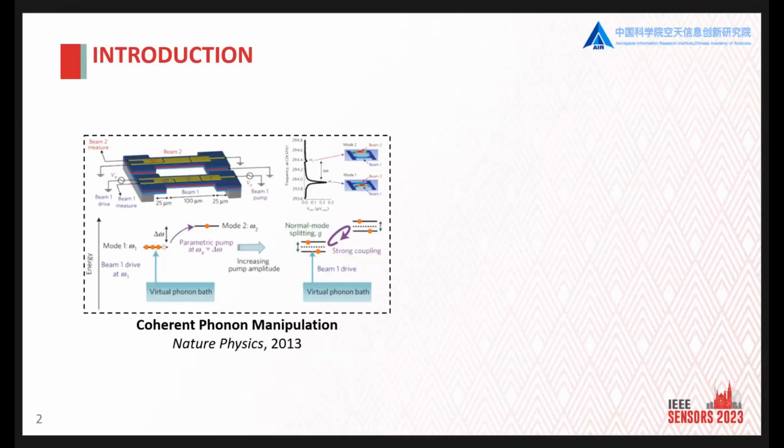In 2013, a paper published in Nature Physics demonstrated strong dynamic coupling between two mechanical resonators by periodically modulating or pumping the stress of the resonators. That is parametric pump. This strong coupling caused by parametric pump enables coherent transfer of phonon populations between the resonators, thus revealing the possibility of achieving high-speed operation of high-quality factor mechanical resonators. This is one of the earliest studies of parametric pump applied to mechanical resonators.

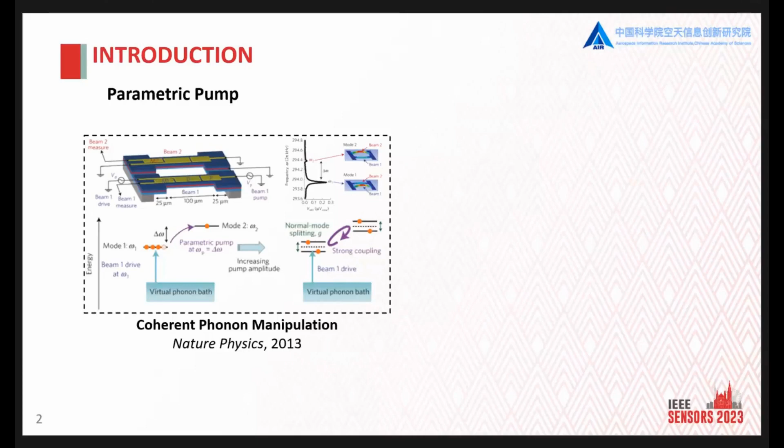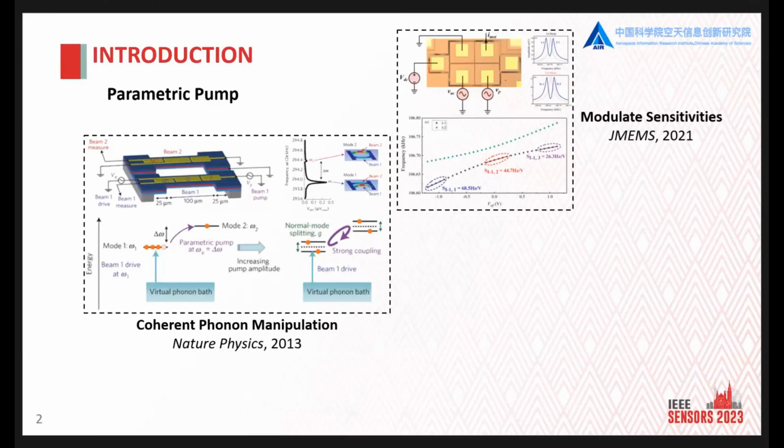Recently, parametric pump attracted great interest. In 2021, researchers proposed a new approach for enhancing the sensitivity of a resonant MEMS sensor based on parametric pump. The parametric pump periodically modulates the stiffness of the beam, thus creating a virtual energy coupling between two fundamental modes of the beam. And the operation region can be found like this. It can be found that the sensitivity of the resonant sensor can get over 100% enhancement.

In 2022, Miao and Zhou published an article in Nature Communications. They demonstrated nonlinear operation of electromechanical phonon cavity systems. By controlling the parametric pump, nonlinearity-mediated digitization and amplification in the frequency domain can be achieved, which can be exploited to build high-performance MEMS sensing devices based on phonon cavity systems.

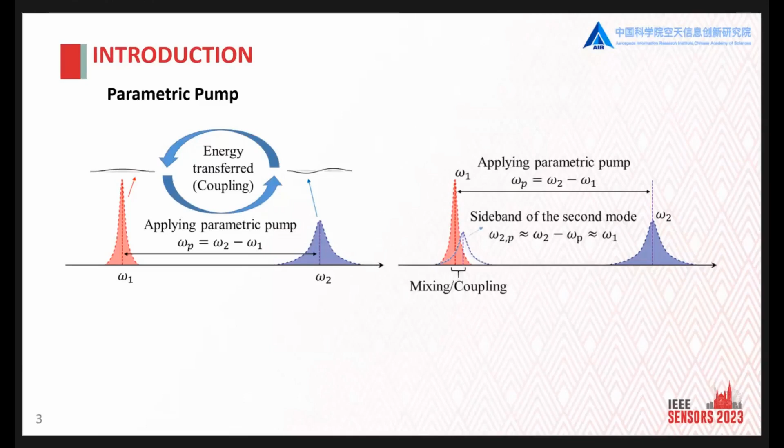Generally speaking, the parametric pump is applied to compensate the frequency difference between the first and the second mode of the resonant beam. Thus, the two modes can be coupled, and energy can be transferred between them, as shown in the left figure. Another explanation for this coupling is that with the parametric pump, there is a sideband of the second mode near the frequency of the first mode, resulting in mixing of the first mode and sideband, as shown in the right figure. Through this coupling, characteristics can be transferred between the two modes so that the characteristics of the sensor can be modulated. Equations of the coupling vibration can be obtained as follows.

In order to study the sensing application of parametric pump, simulation and experiments were carried out based on the resonant pressure microsensor as above. The pressure sensor is comprised of a glass cap for vacuum packaging and a silicon-on-insulator wafer for pressure sensing. Double-clamped beams are fixed on a pressure-sensitive diaphragm through anchors. The diaphragm is deformed by pressure, thus changing the stresses and frequencies of the beam.

We can see the electrode configuration of the beam in the center like this. It is electrostatically actuated by an AC voltage V_AC, and with another AC voltage V_P, parametric pump is introduced.

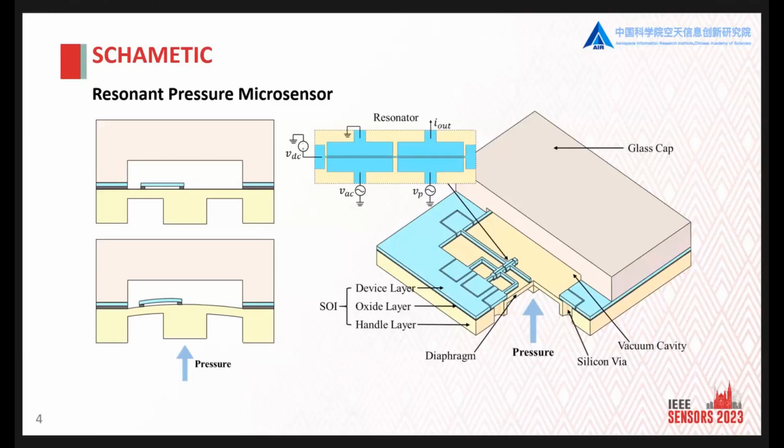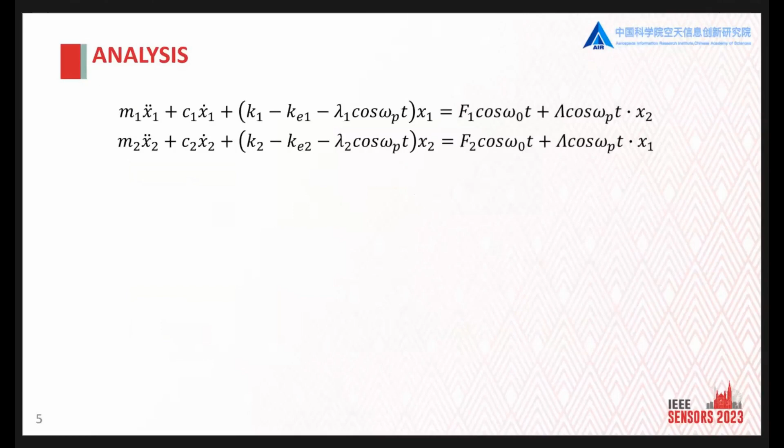First, to analyze the theoretical model of the system, the harmonic balance method is employed to develop the numerical solutions to the equations, which are the combination of harmonic terms like this. We mainly consider terms related to the first and second modes, that is to say, S takes 0 and 1. Other harmonic terms are neglected due to small responses.

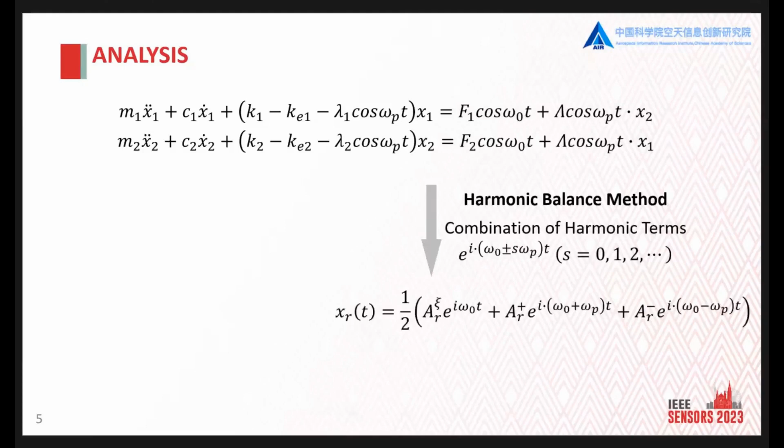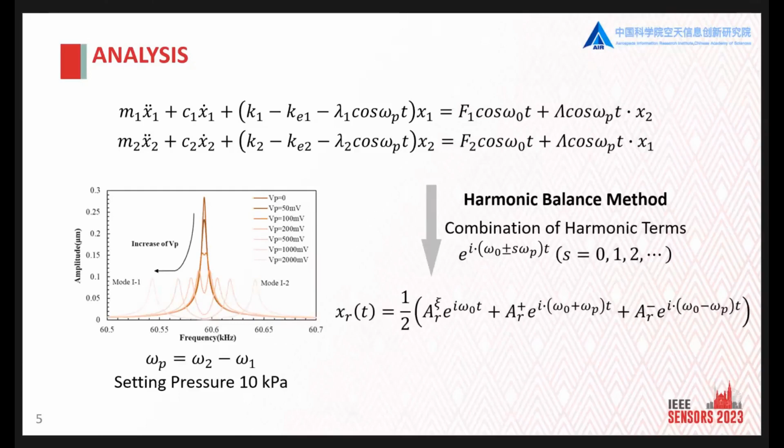With extra pressure disturbance, omega 1 and omega 2 are changed, and there is a mismatch between omega p and the actual frequency difference between the two modes, so that the distribution of energy between coupled modes is out of balance and mode localization occurs.

On the one hand, for frequency shifts, frequencies of the two new modes are separated from each other with pressure disturbance, which is called the veering phenomenon. As we can see, the sensitivity of mode I2 is transferred from about 164 Hz per kilopascal, approximately the sensitivity of the first mode, to 210 Hz per kilopascal, approximately the sensitivity of the second mode.

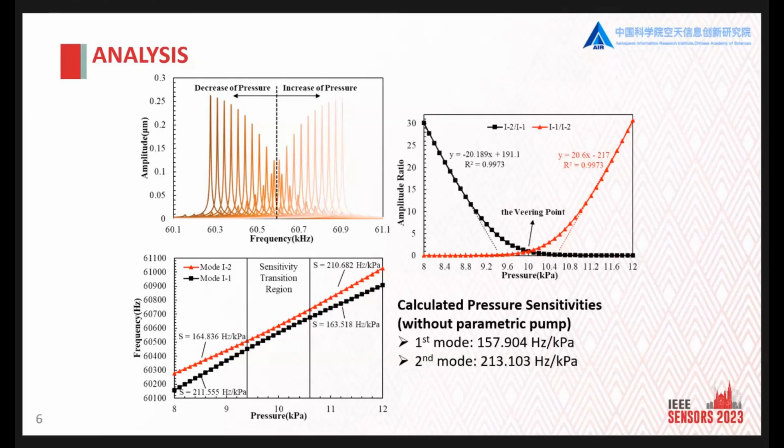In other words, modes I1 and I2 inherit characteristics of different fundamental modes outside the transition region. In the sensitivity transition region, the two modes are influenced by each other, and sensitivities are changing. On the other hand, as a function of pressure, the sensitivity of amplitude ratio is quantified as about 20 per kilopascal within the linear range, which is relatively over 1,000 times higher than that of frequency shifts.

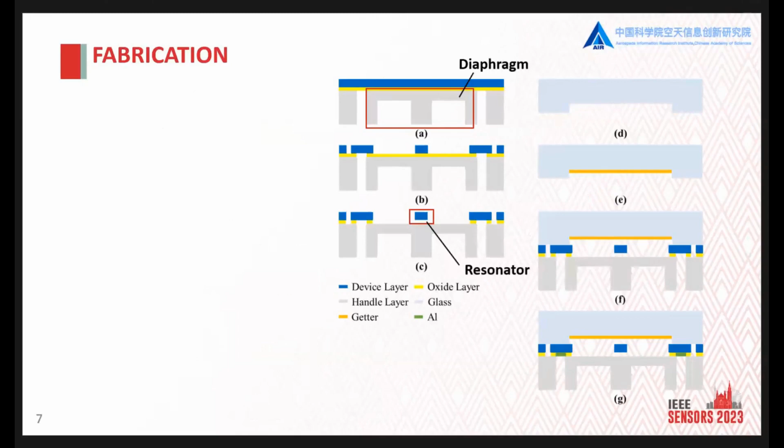In order to verify the theory of parametric pumps, the designed microsensors have been fabricated as shown in the figure above. The SOI wafer undergoes a series of lithography and etching to form the diaphragm and the resonant beams. Glass caps are etched and then bonded with the SOI, thus achieving vacuum package of the sensor. The finished sensor chip is 9.9 millimeter wide and 822 micrometer thick, as shown in the left figure.

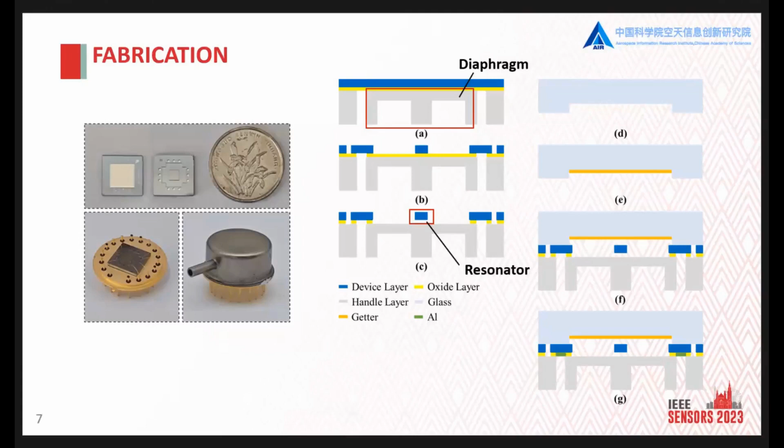Before the experiment, the chip was assembled on a Kovar base. Then, wire bonding was conducted between wires of the chip and pins of the Kovar base to realize electrical connections. Finally, a Kovar lid was soldered to the base to complete the package. The experiment platform is shown above, which mainly includes a circuit and a vector network analyzer for detecting the signals, a pressure controller for applying pressures, a temperature chamber for temperature control, and a signal generator providing the parametric pump.

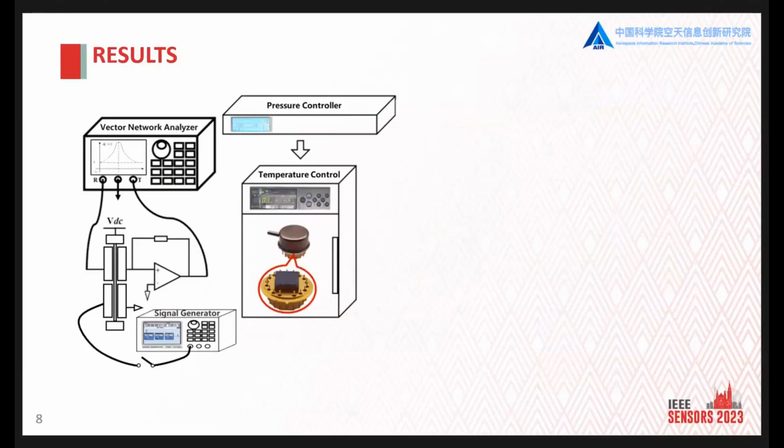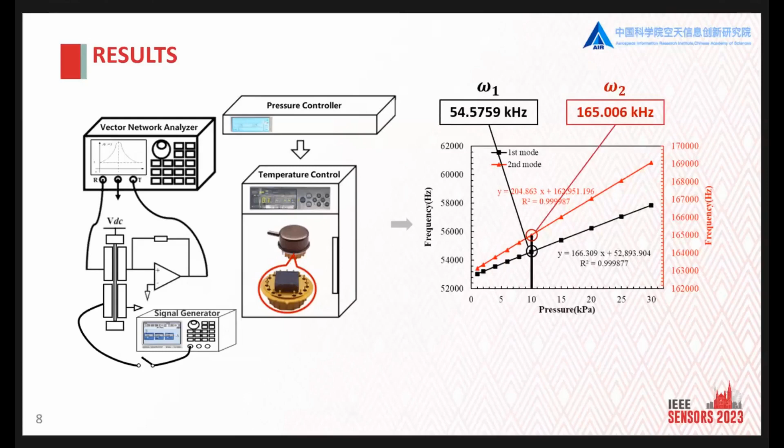The figure on the right shows the characterization result of the pressure microsensor without parametric pump. The pressure sensitivities of the frequency shifts of the resonant beam are about 166 and 204 Hz per kilopascal. Under the pressure of 10 kilopascal, the frequencies of the first and second mode are about 54 and 165 kilohertz.

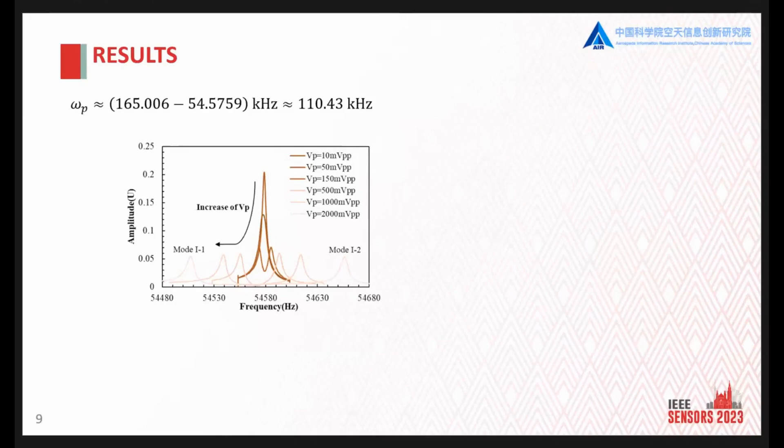With the increase of pressure, the pressure sensitivity of mode I2 increases from about 173 to 202 Hz per kilopascal. The sensitivities of the amplitude ratio in the linear range are about 6 to 7 per kilopascal, relatively over 1,000 times higher than the sensitivity of frequency shifts. As we can see, the experimental results are almost the same as the simulation results.

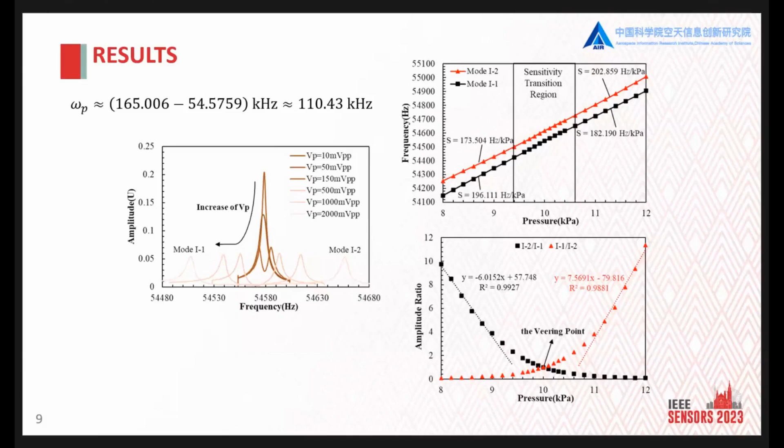Furthermore, different from mode localization in weakly coupled resonators, the veering points and coupling strengths presented in this paper can be modulated by changing the frequency and amplitude of parametric pumps, making it possible to adjust the linear working range and sensitivity of amplitude ratio of the pressure microsensor.

To sum up, with parametric pump applied and extra pressure disturbance, the phenomenon of mode localization is observed in a single resonator, while the sensitivity of frequency shifts of the sensor can be transferred, and the sensitivity of amplitude ratio is much higher than that of frequency shifts. As the veering points of mode localization and coupling strengths are controlled by the frequency and amplitude of parametric pump, it is possible to adjust the linear working range and sensitivity of amplitude ratio of the pressure microsensor.